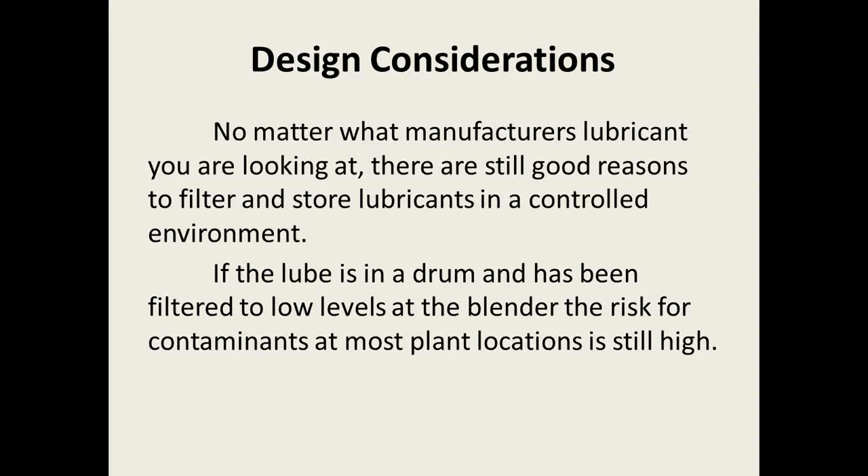Some of the additive packages are missing, or there may be moisture in the drum. A lot of people ask why I test new drums of oil - well, you find out a lot of failure modes just with the new oils.

So we have to filter out those contaminants to make our equipment last longer. But it's good to be familiar with your plant operation and what kind of contaminants may be present in the lube areas, what forms of foreign material are present. I was at an aluminum recycler a few months ago, and looking at their lab analysis reports from Insight, we found a high concentration of aluminum dust coming from their ambient conditions - not sealing things up - and particles in the lube containers.

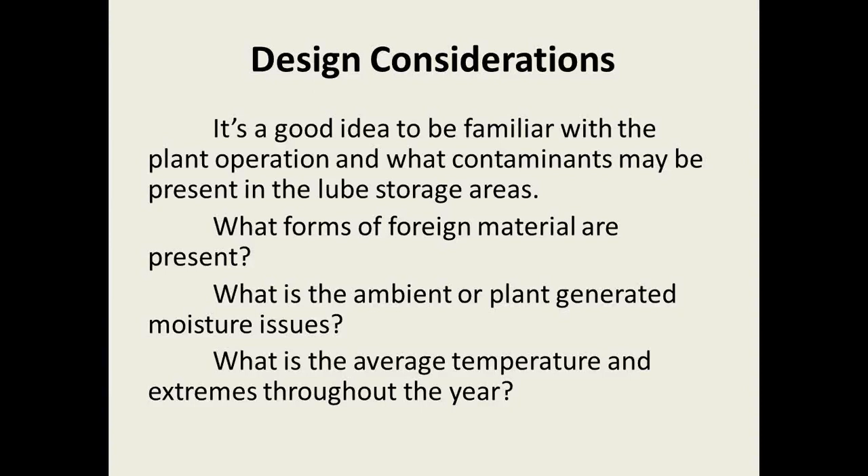What kind of moisture issues do you have at your plant? Are you a food plant where you have wash down issues? Is the equipment exposed to outside rain and high humidity like along the Gulf Coast? What's the average temperature extremes? I remember the plant I came from - in the lube storage area originally we could get as high as 110, 115 degrees in that building in the summer, and minus 20 in the winter at times. We had temperature extremes that cause your drums to pull moisture in. So look at all those conditions at your plant - what are we trying to eliminate?

When I do my failure modes of lubrication training, I talk about the 5 major lubrication failure mode areas: temperature failure modes - how can we control temperature; moisture failure modes that are in our lubes; and foreign material particles that may be in our lubes - what's the particle counts and what are those particles?

Viscosity failures - I don't have a lot of instances, but I've got a few where drums of oil sent to a plant from a manufacturer may have had ISO 220 stamped on the drum, and when I ran the test on the drum, it was ISO 150.

And then, of course, what other kind of contaminants besides moisture and particles are present? If you're storing your lubes around areas where they're storing lab chemicals, is somebody using those same containers that you're using lubes in? I was at a plant just a few months ago where they had their antifreeze for mobile equipment stored in the same area - there was antifreeze contamination because they were using the same containers for everything.

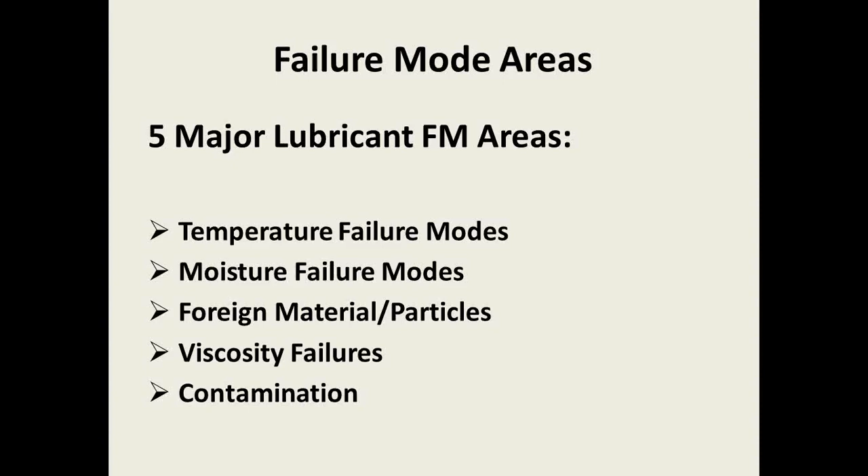So some program failures - I just highlighted a few here that go along with lube storage: not having procedures in place for ordering, receiving, storing. I've helped a number of companies write procedures for what happens to the lubricant as soon as it gets to the plant, how it's received, where it's stored, how it gets out of the environmental conditions.

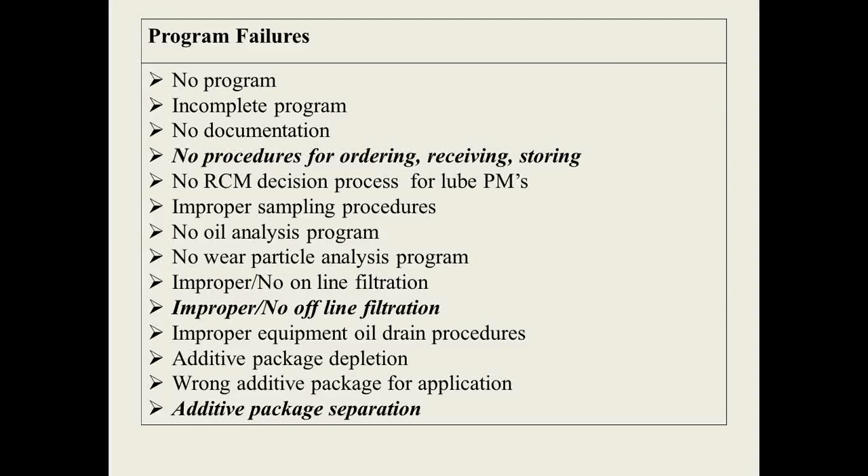Not filtering your new lubes as they come in - here's one a lot of people don't understand: additive package separation. The longer that lubricant is stored, especially engine oils, additives do settle to the bottom, so you can get additive package separation in your container or drum. This is one reason why, as a Cargill standard and some standards with other people that buy lube rooms, we recirculate the container once a month for about 10 minutes to remix that additive package - a very important process.

Here's some more highlights: no best practice lube storage rooms, no lube consolidation program. I've worked with a number of companies, and one I'm getting ready to go do a project on now where they have over 50 lubricants in the plant, and we're going to try to consolidate that down in the mid-20s. I was at a plant that had 22, and we were able to consolidate their program down to 10. A lot of times it's just the additive packages and different things like that, and we can consolidate a lot of those lubes down to get the minimum number of not only oil-based lubricants but grease-type lubricants too. No filtration training - a number of times I've asked people at the plant what's the micron rating on the filter on your hydraulic system?

Well, they have no idea what that means. They have no idea what the beta rating is. So with this training, they can order the correct filter and remove a lot of these particles and moisture.

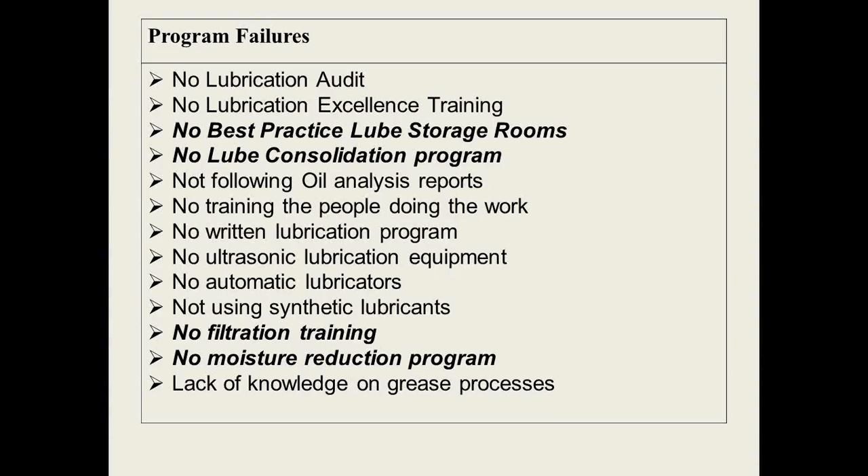You know, no moisture reduction program in place to reduce moisture getting into their lubes and products. What about foreign material? New oils are contaminated. Those particles are in there from the process of actually building or designing and building the drum itself, and the process the way the manufacturer actually fills the drum. Are they using the proper filtration? Are they storing it correctly? So it's one of these things, improper filtration of new lubes. All new lubes should be filtered. And then there's the filtration in your process equipment.

Even if we put a perfectly clean lube in your process equipment, it's going to gain particles over time. Now, are those particles dust or from the environment, or are they particles of wear from your machines? Well, the lab analysis can tell you that, but we need to filter those particles out so they don't cause wear. There's plants that have no filtration practices. They change oil on a regular basis, but maybe the oil they're putting in there is dirty. Maybe the oil that they're running is very dirty. You're not using vent filters to keep moisture out.

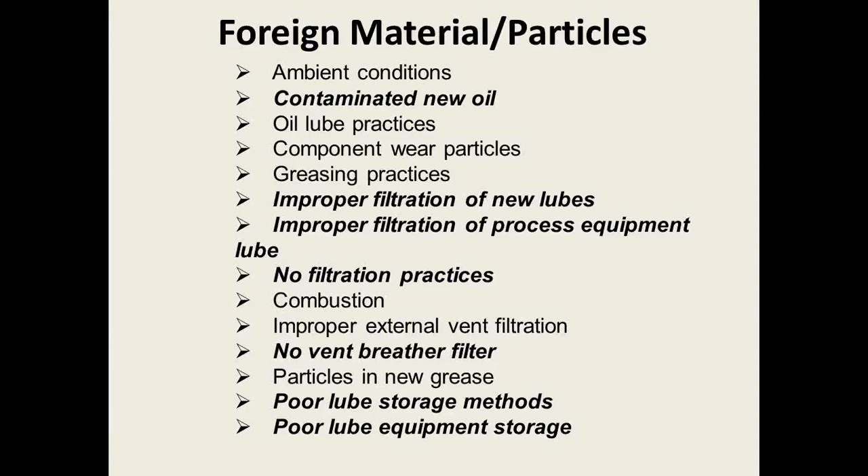Poor lube storage methods and poor lube equipment storage. You can put your lubes in perfect condition, but if our maintenance people are running around with vinegar jugs and Tide jugs applying the lubricant and storing those drums out in the rain and in the ambient conditions, we may still be adding particles to our system.

Moisture failure modes. Where does moisture come from? Ambient conditions, humidity and rain, and some washdown practices at food plants. Lubrication storage methods, you can gain a lot of moisture. If you have a drum of oil sitting in the sun, it heats up during the day, you get a little bit of rain on top of that drum, and it cools down at night. Even though the drum's never been opened, you'll pull moisture in through those bung fittings.

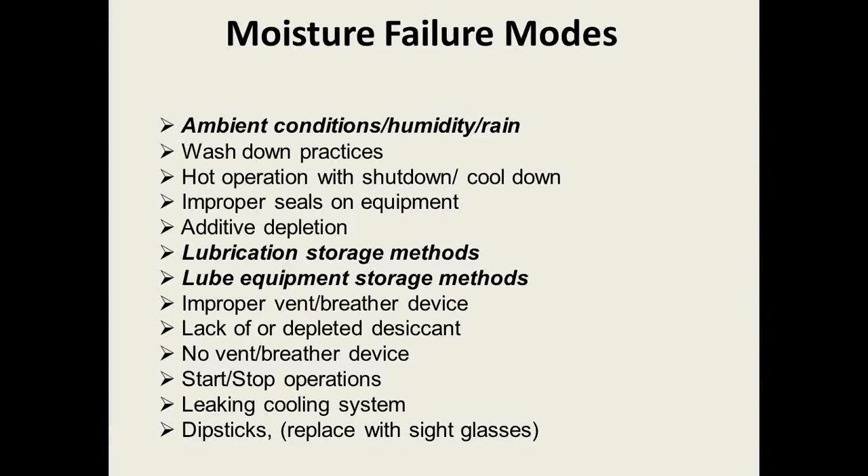What kind of equipment are you storing your oils in? We can gain moisture in those areas. So many of the failure modes in our plants start with our lube products not being received and stored properly. Moisture, FM, contaminants are in and around the lube containers and the lube equipment. And remember always that new lubes are not clean.

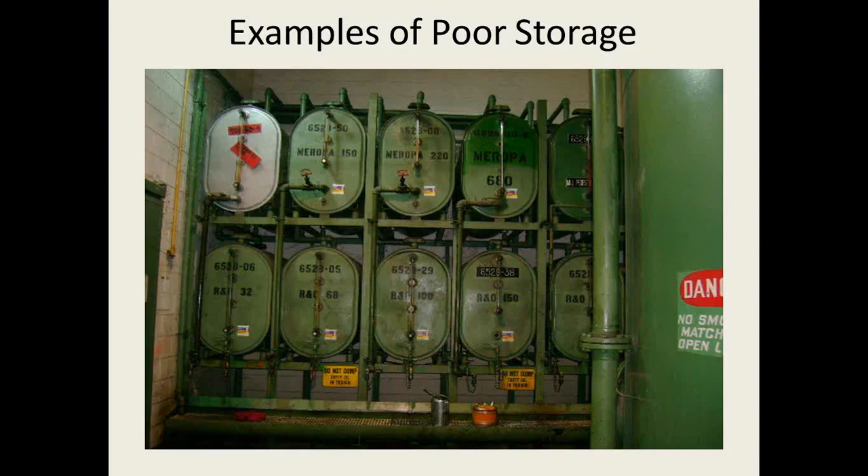This looks like a good storage system. This was at a power plant, but these tanks had been in there about 25 years. There was sediment in the bottom. They were filled from the floor upstairs where they dumped drums into a big sink and just opened valves to get them down into these containers. Even in the sight glass they looked good, but there was a lot of sludge, a lot of crud, and of course they were steel tanks in an unambient controlled room, so we surely had some rust in there. In the oil analysis on a couple of these tanks, we had moisture, high particle counts, and a lot of issues causing wear for their equipment.

This looks like a normal lube storage room. This one's a little cleaner than most I take pictures of, but here again, there's no desiccant breathers on the drums. The room was in an area where it goes through all the ambient changes, no heating, no air conditioning here, no filtration on the drum coming out. So again, a lot of improvements can be made in this lube room.

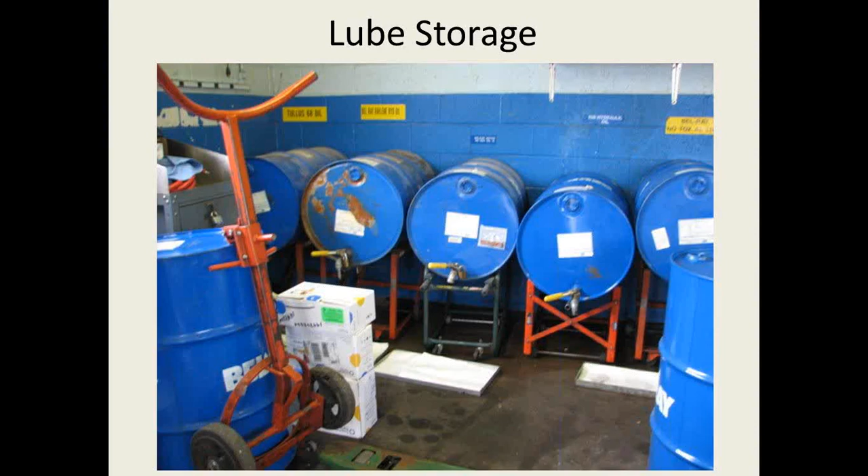Here's one where the drums are stored right out in the plant. You can see open containers that they're using for oil stored there. You can see drum pumps, funnels, all kinds of bad practices here that are going to cause moisture and contamination in your lube area.

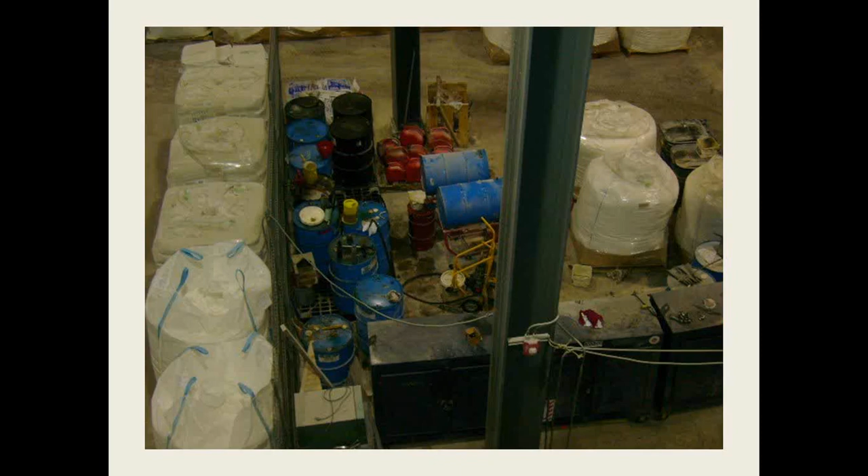This is in another facility where they're storing the lubes in an area where they're storing diatomaceous earth, silicone, and all kinds of filter aid products. You can see the filter aid and particles on top of the drums, and the yellow containers sitting on top. One of them has oil in it in the middle.

This looks like a clean area here. There's a drum of oil, this is for an expeller. This was at a plant in Canada. The expeller gearbox that the maintenance people topped off, probably daily, was about a $400,000 gearbox.

You can see this funnel sitting there covered with dirt and dust particles, not only on the outside but on the inside. As I watched them do this over the course of 2 weeks, they would, without a doubt, go over there and just dump the oil right into the gearbox. Again, high particle counts in very, very highly critical and expensive gearboxes, causing them to wear out about half as fast, or twice as fast as they should.

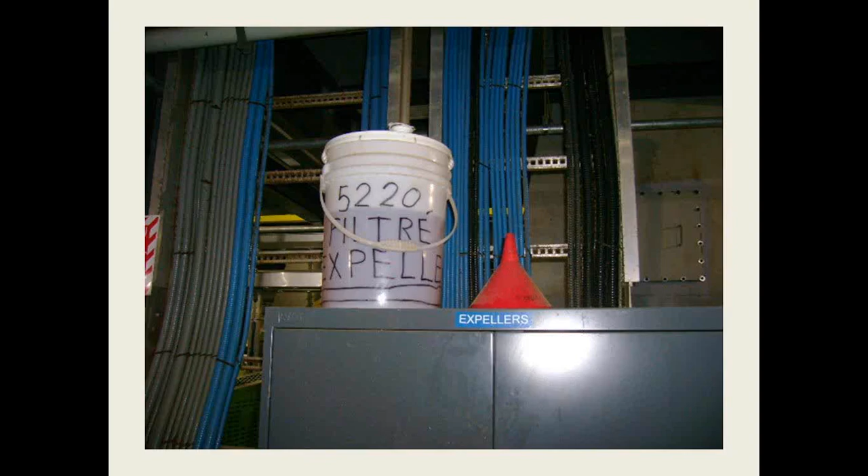I put this picture in as an example of precision lubrication storage. They've got new oils in here, used oils in here, mop buckets, and a shower curtain to keep contaminants out. Probably not a good storage area, and a lot of improvements can be made here.

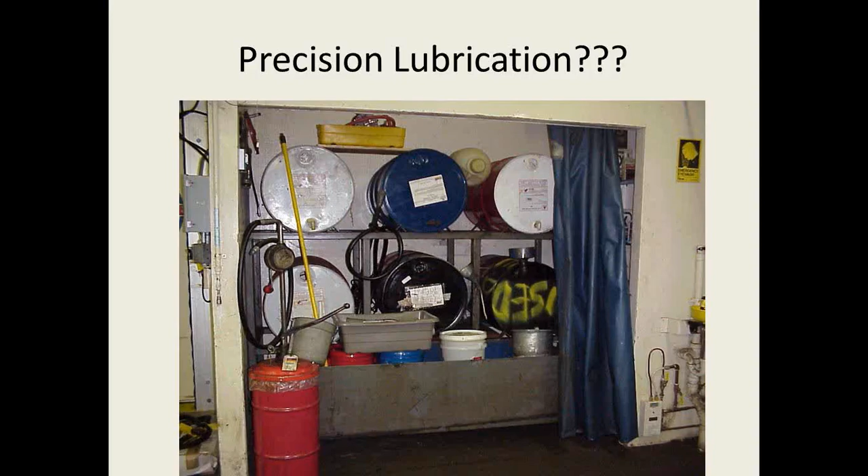So again, why do we need effective lube storage? Our lube products need to be protected from the environment, the plant dirt, the FM, the moisture, the sunlight. We need to filter our new lubes, or lubes as you use them.

A lot of my customers will just store the drums, and we have a little recycle device we can buy from Des-Case that will actually pull the lube out of the drum, recirculate it through a filter, and put it back in the drum. So we do a couple things with that: we filter the lubricant while it's in the drum, and we also mix up the additive package that could have settled to the bottom. There's also a spigot on there where they can take clean oil right out of the drum into their container.

Storage of your lube application equipment, your containers, funnels, grease guns and filters, these should all be stored in clean areas. We're trying to eliminate particles, and keeping your lubes separate from other plant chemicals.

I can't tell you the number of plants I've been in where you go in the lube storage area and there's lab chemicals and all kinds of other things in there that shouldn't be, and they're not properly labeled.

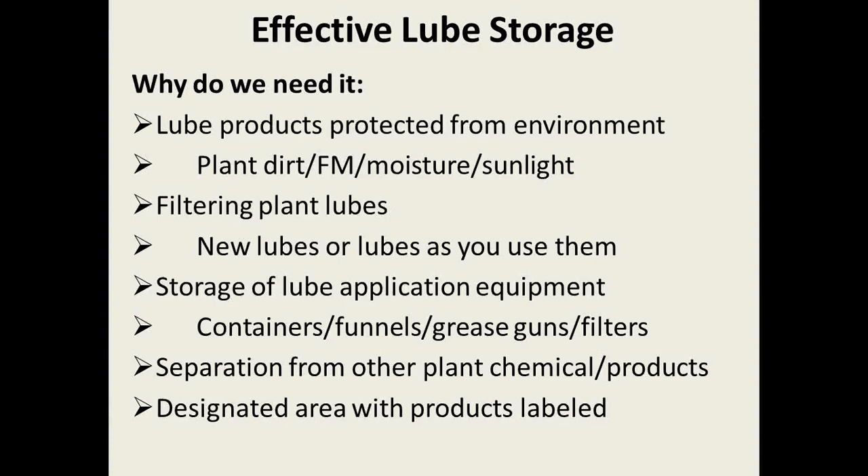There was a major failure at my plant where one of my maintenance people put the wrong lube in an Alfa Laval centrifuge. The lube had a 25 on it from Alfa Laval, and the ammonia compressor oil for that plant also had a 25 on it. You can imagine what happened 24 hours later when the gears failed - that was a major downtime just by not having things properly labeled. So labeling is very important.

Products should be stored at a controlled temperature. One reason people tell you to store your grease guns on their side or on their ends is because if they warm up above 104 degrees, the oil will actually start separating and leaking out. And of course, if you're storing them at a higher temperature, they will oxidize a lot faster.

You want a product stored in controlled humidity conditions so moisture can't get into our lubes. We want our products labeled and visible so it's easy to see. Now, the ISO codes for different colors of lubes—as we build more and more lube rooms, it's becoming more popular to color code not only the lube container, but the lube equipment. It's a clean area to fill the lube equipment.

A lot of times I go into plants. I was at a gypsum plant where the maintenance guys were filling the lubes with massive amounts of dust in the air, filling their containers up in the lube storage area. And of course, that dust was going right into their containers.

We can recirculate our lubricants to mix additives and refilter them. It's a better inventory control method—using the oldest lubes first.

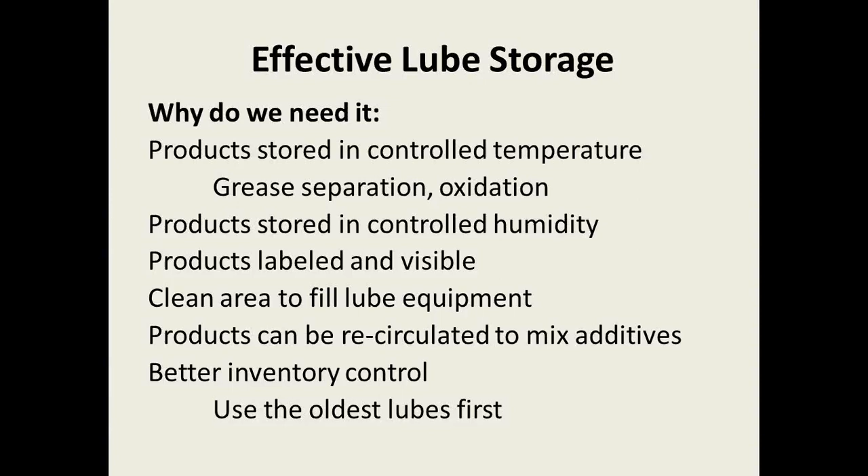I was at a plant in Texas where I crawled across the top of a bunch of drums stored in the lube area, and there was a drum that was 10 years old in the back of that storage area that had never been used. Of course, the supervisor asked me what he should do with it, and my answer was you have to dispose of it. There's moisture, the additive package is gone, and it's going to add no value as a lubricant in your critical equipment. So again, we have to move from storage areas like this where we have lots of dust and contaminants, and we need to move into areas where we can eliminate the dust and dirt and the things that are around there.

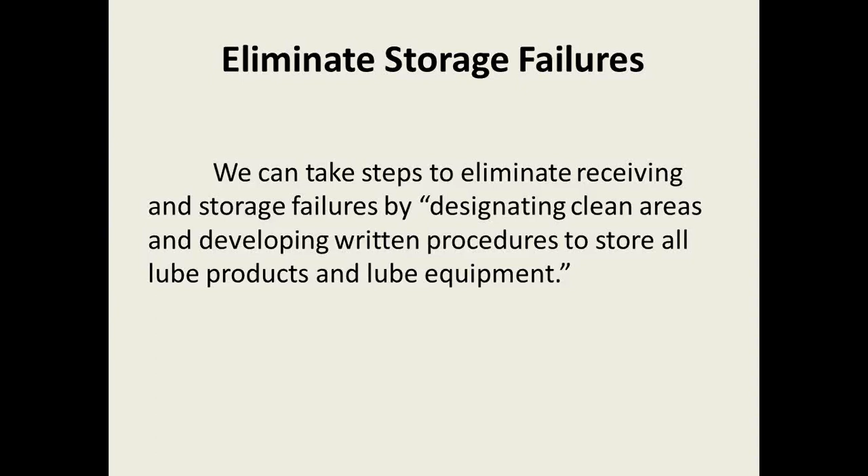This develops the need for writing some written procedures. If anybody needs help, I've got a couple that I've written for companies that probably won't mind if I share those with you—just what your written policy should be for receiving, storing, and taking care of your lubes. So it's a must for any plant moving into lubrication excellence. If you've even thought about it, or this is something your plant is looking at, this is the first step.

So remember, I'll repeat: your new lubes are not clean. They're clean to some standard. If you check with Insight and look at their reference samples, you'll see most lubes are 18, 16, 15, probably as an average. That's normally what I find in brand new drums of oil, but as those drums sit around and go into different equipment, you'll see those ISO counts go up into the 20s. Now, I like to take new lubes and filter them down to 16, 15, 12 if I can, or better. That's why we try to put filters on our lube rooms to do that.

Our lubes must be clean and dry. You'd be surprised how many lubes I test when you go down to the bottom of the barrel or drum when you pull your sample, and see how much moisture or other contaminants are in the bottom. You know, controlling the environment that your lubes are stored in—I talk to plant managers about this, and they look at you like you're crazy that you need your lubes stored in an air-conditioned room or a heated room. But it's actually true. If you want those lubes to last a long time, we need to store them correctly.

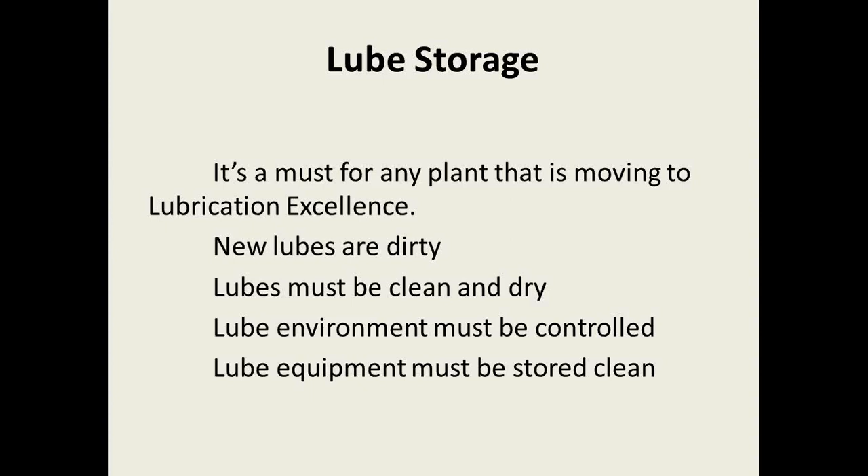This is an illustration of a human hair—these are the particles we're trying to get out. That big particle there is probably 40 microns. The diameter of a human hair is about 70 or 80 microns. So you can see the particles causing us the most trouble are not ones we can even see with the human eye. The human eye can only see a particle larger than 40 microns. We need to reduce our particle count—we need to get out those particles we can't see.

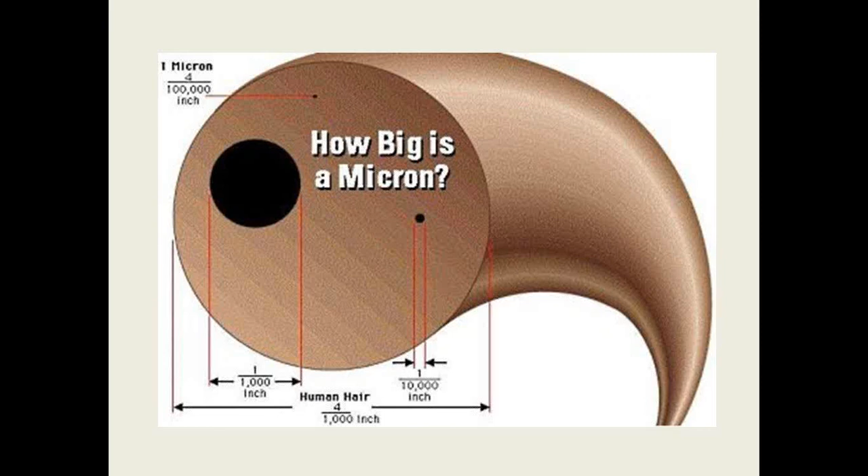This is a slide from when I was doing training at my plant for my maintenance people years ago. The sample on the right, I had a maintenance person pull from a gearbox. The oil had been changed about 2 months previously. I had him bring it into the shop in a glass sample jar, had every one of my maintenance people look at it, and asked: should we change the oil? The oil looked great.

It was a golden color. I couldn't see anything in it. They couldn't see anything in it either, and they all said no, there's nothing wrong with that oil.

When I sent it to the lab, this is the picture that came back. It was a 22-19-17. All these particles in there: fly ash, coal dust, some metal particles, a little piece of brass or bronze there.

We went up there and filtered that gearbox with a 10-micron beta 200 filter. The lubricant came back from the lab as a 17-14-12. This is what it looked like under the 100-power microscope.

Now all I had to do was ask: how much longer will the gearbox last if we keep the oil like it is on the right rather than like it is on the left? And the answer, this is going to be the same for all your equipment, whether it's a hydraulic system, an engine, or a gearbox: they're going to last 5 or 6 to 8 times longer.

And I've seen particle counts. I was at a plant in Alabama where we pulled oil samples out of all the hydraulic units. They had nothing in the plant cleaner than a 23, 22, 21. So after they did the training, they did a lot of filtration. We built a lube storage room there, and they're going to get a lot longer life out of their equipment. For that plant, probably 8 to 10 times more life.

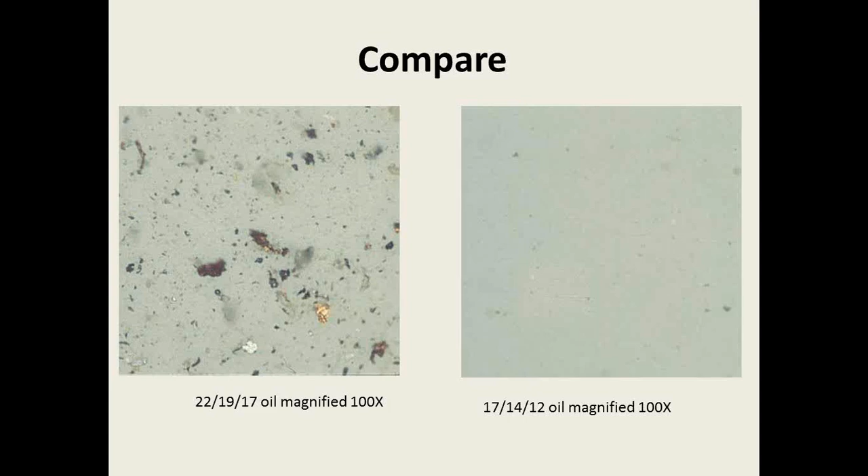This is just a typical hydraulic system. If we take an ISO code on the side there, a dirty ISO code, let's look at the 22-19-17, and we filter that oil down. If we go to the top bar, filter it down to a 16-13-11, which is about 10 micron beta 1000, you're going to get around 5 times more life.

And as we start filtering that oil down to these lower levels, you can see if we went down to a 3 micron beta 1000, you're looking at 10 times the life. So that's a typical hydraulic system, and I know it works. We accomplished it at the plant that I came from, and we're accomplishing it at a lot of facilities around the U.S. and around the world.

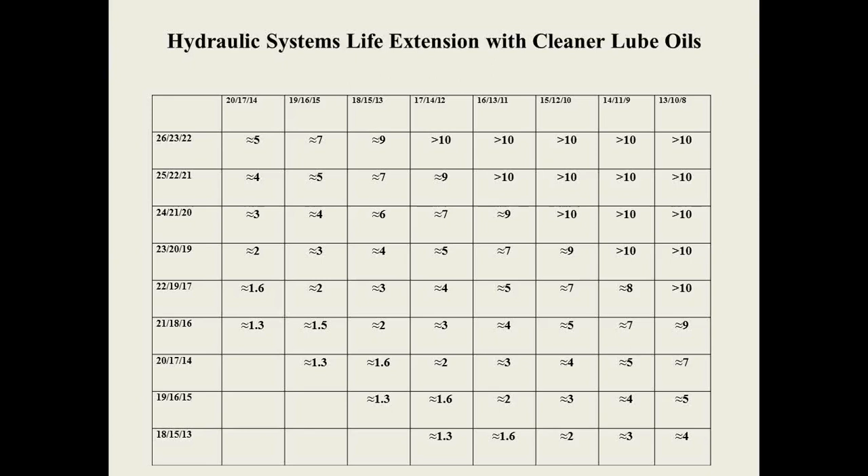Moisture failure modes. If we look at the left-hand column here, we see 1,000 parts per million of moisture. If we can reduce that 1,000 parts down to 50 parts per million, look at, if you follow that bar up to the top bar, that's 6 times the life just from reducing moisture. So you can see the effects of particles and the effects of moisture have a huge effect on the life of your equipment. Both these things we have to figure out how to keep out and how to control in our plant equipment.

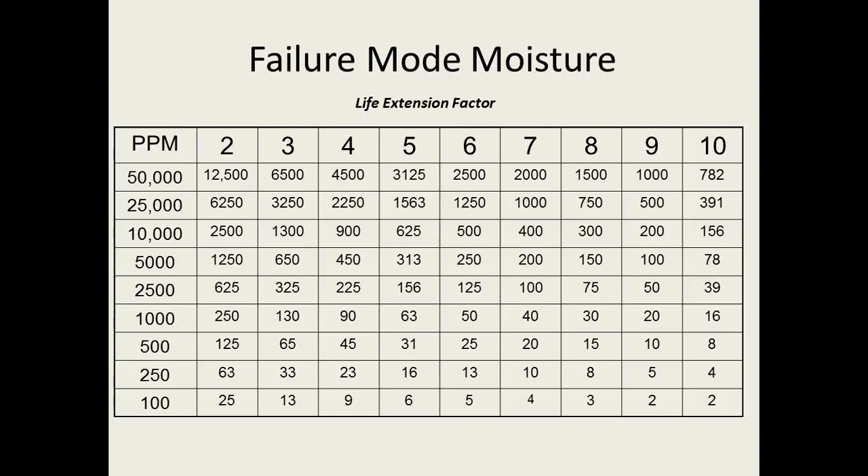Here's a bearing life extension chart. Again, I'll show one more of these where we see the 22-19-17 on bearings, and we follow that line across to the 16-13-12, your beta 1000, 10 micron, and you can see that's around 3 times the life. And then as we clean that oil up, the life gets better.

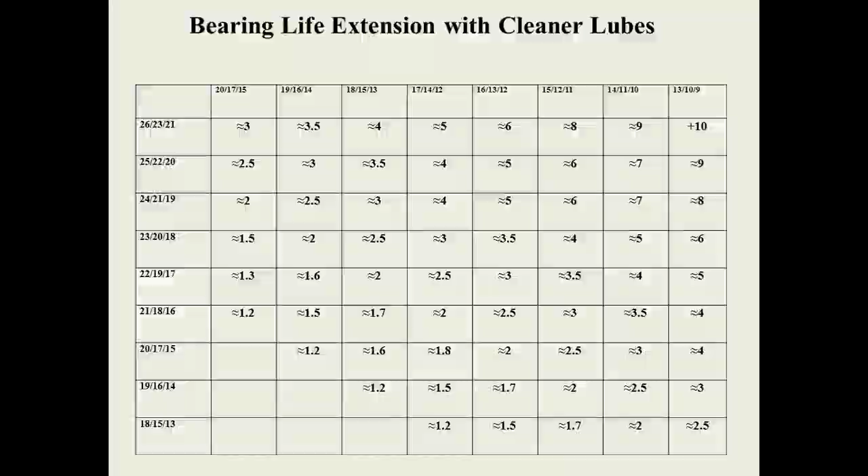So lubrication storage fundamentals: again, develop those written procedures for how to get the product stored, how you get them filtered. Develop some filtration standards for moisture and for material. Now, one of the things - if you're not careful, you don't want to start filtering down to very low ISO codes right away. Pick a contamination level. If you find a lot of your equipment's above 20, try to get that filtration level down to about an 18, 16, 15, at least back to new in your equipment. Then as you get your program developed, start using better filters and better procedures.

Design an area away from foreign material, moisture, and contamination, and make sure that room is ambient controlled - it's very important for the life of your lubes. Store lube equipment in the area to keep particles off your lubes. I remember my guys got so into this that when they came in at the end of the day, they would put their grease guns into a plastic Ziploc bag and put them in a cabinet. We were trying to control all the particles that were in our equipment.

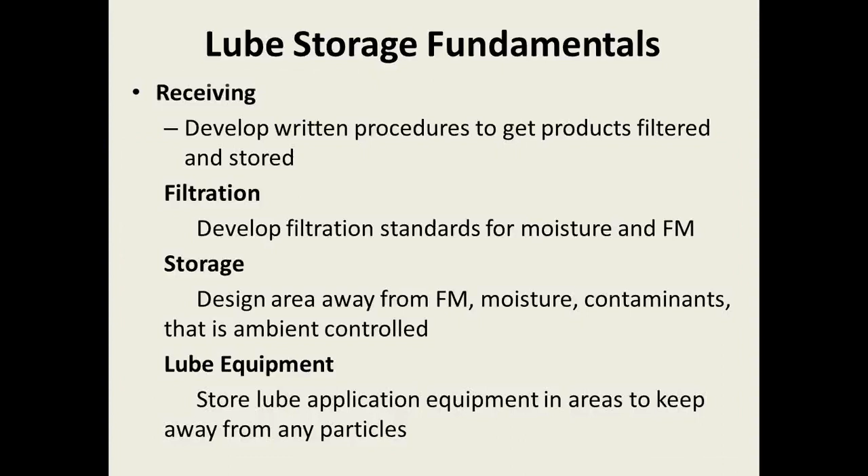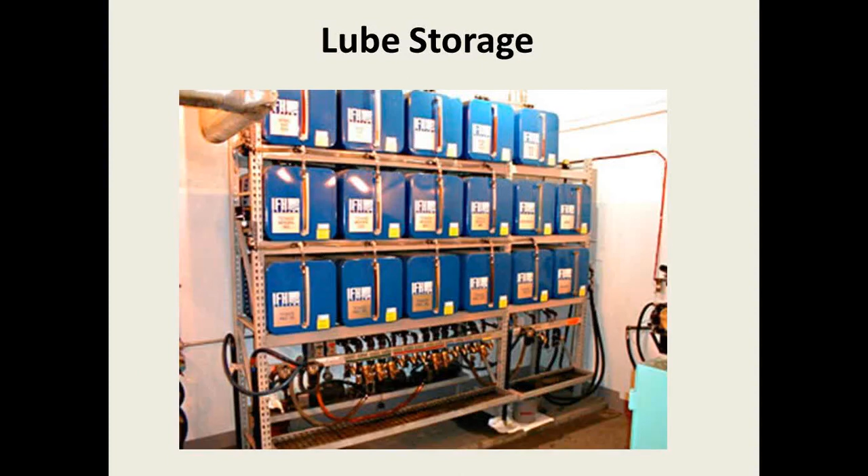This is some bulk storage at a facility. The reason I kept this slide in there - one of their big issues was a lot of moisture in the oil, so we put desiccant breathers on top of these tanks. I came back six months later and the breathers had gone from blue to red to white. So I told them, if you're not going to change the breather, you might as well just put the vents back on top to atmosphere. But again, this is our effort here - we're trying to eliminate moisture.

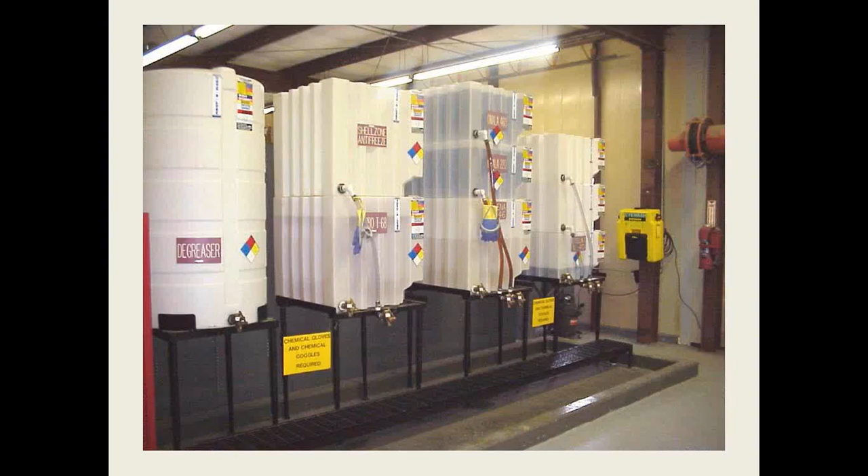Another lube storage area, building a chemical area of the plant. But again, lube's in clean containers, in a spill-controlled area. They're trying to make an effort to keep their lubes in an area where they're not going to get contamination.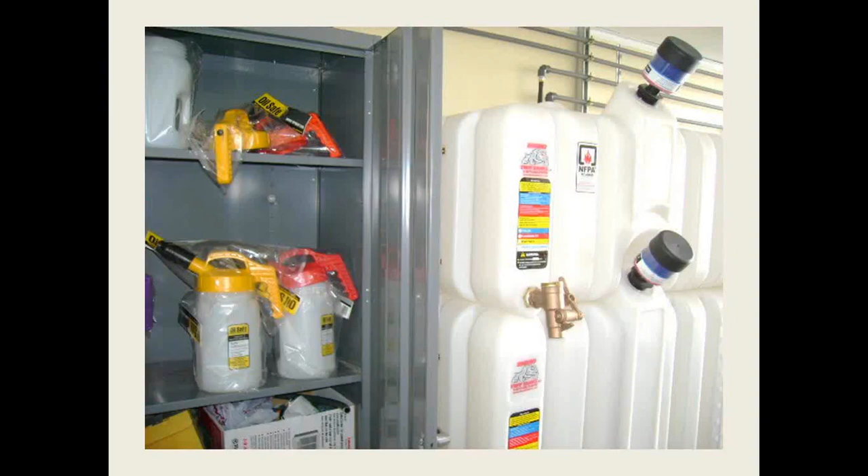Here's a picture of a storage cabinet. This is in one of the lube rooms we sold a customer. They got their oil-safe containers, they got a cabinet in there, they got some plastic storage containers to store all their lubes. And this room is actually in an ambient controlled room also.

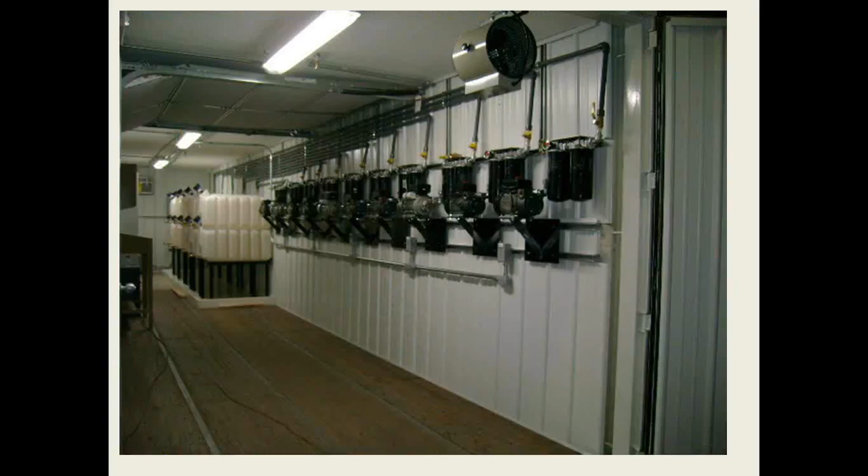Here's a 40-foot shipping container we built for a customer in St. Louis, or outside of St. Louis. They had 10 different lubricants there. Every lubricant came into the room, there were 10 different pumps, each with dual 10-micron beta 1000 filters on there, and it pumped the oil into the 10 tanks you see at the far end of the room.

Desiccant breathers - each pump would have a lance. They had stored drums right underneath the pumps. But you can see a very, very nice storage room. The room was air-conditioned, the room was heated, and only certain individuals were allowed in the room to maintain it.

This one had some spill control. You can actually, in these 40-foot containers, make the whole bottom floor spill control if you want more capacity. But you can see a nice storage room. Again, all they have to do is hook up the power when it arrives at the plant.

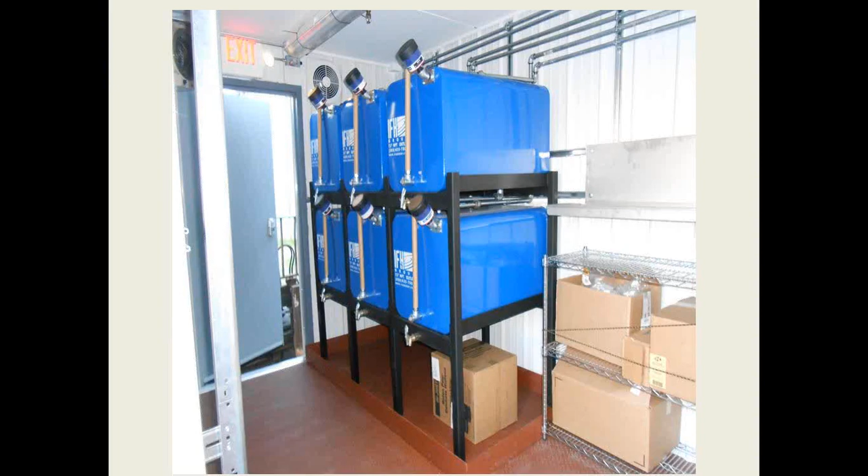Here's some of the options, storage benches and cabinets and things like that you can use in the room. This is a company that uses all steel tanks, all steel piping, and a steel floor. Their conception of fire control was to keep everything in steel. But as I'll explain later, lubricants aren't very susceptible to catching fire, so we'll discuss that on the last slide. Here you can see another effort, an ambient controlled room to control where the lubes are stored. Very nice setup.

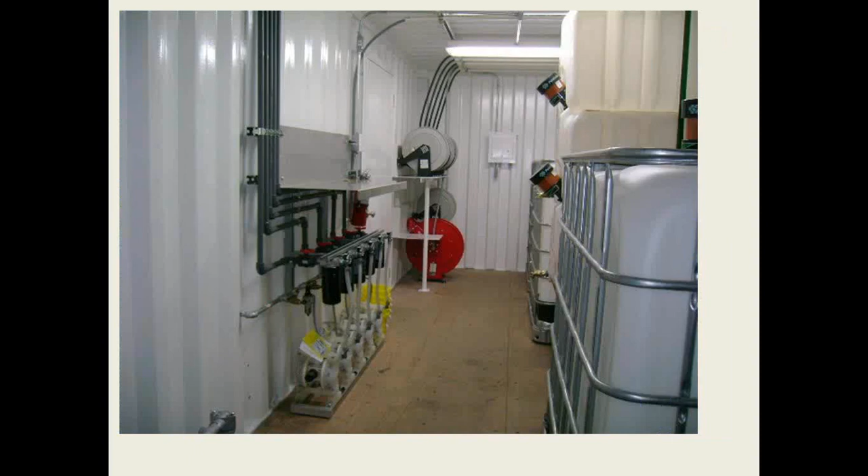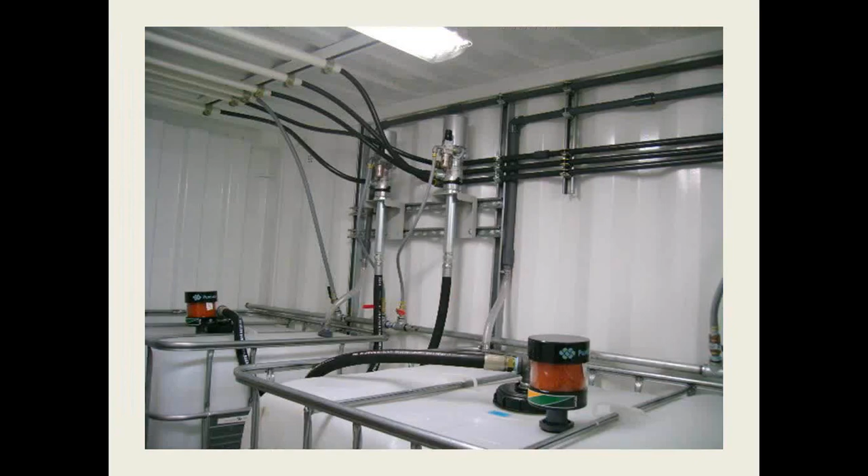This one here was unique. This is in a salt mine about 1,800 feet under Lake Erie and about 3.5 to 4 miles out under the lake. The company has a lot of mining equipment down there, so they bring all the lubes in through little air pumps on the side, filter them into these containers, and then on the wall the lubes are pumped from the containers to the hose reels. Nobody's allowed in this room but one person.

Again, with your lube equipment, get your guys trained and in the habit of storing the oil-safe containers, storing your grease guns, storing your greases in a controlled environment. If you can, it can be ambient controlled, but at least get them out of the particles and the dust.

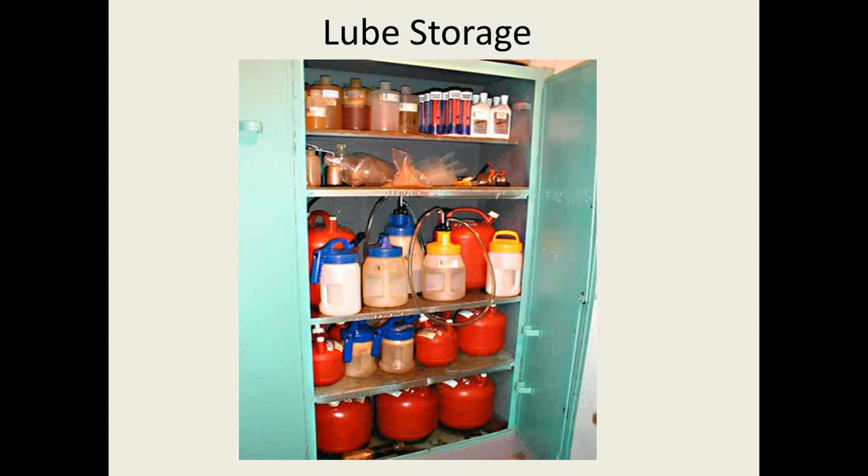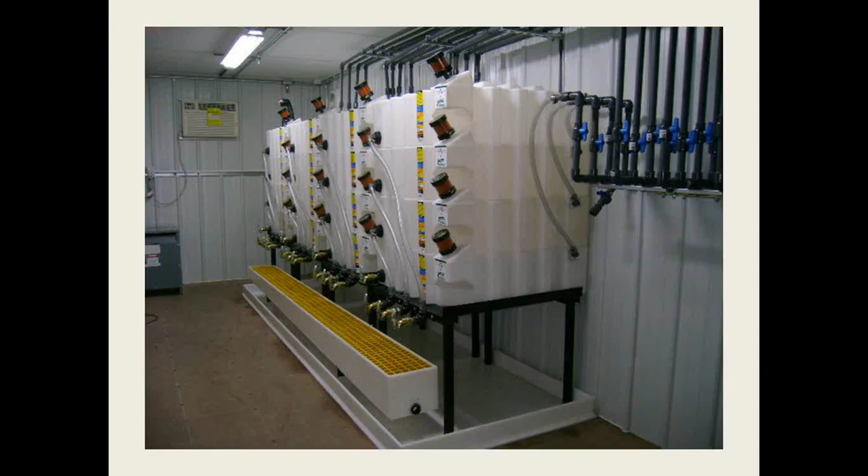Here's the inside. You can see smaller tanks at this facility, all 35-gallon tanks with breathers. They have a drip pan underneath to catch any drops that come out of the spigots, and all spring-loaded valves on the bottom. Again, just a lot of options you can use, and you need to think about some of these as you're designing your room.

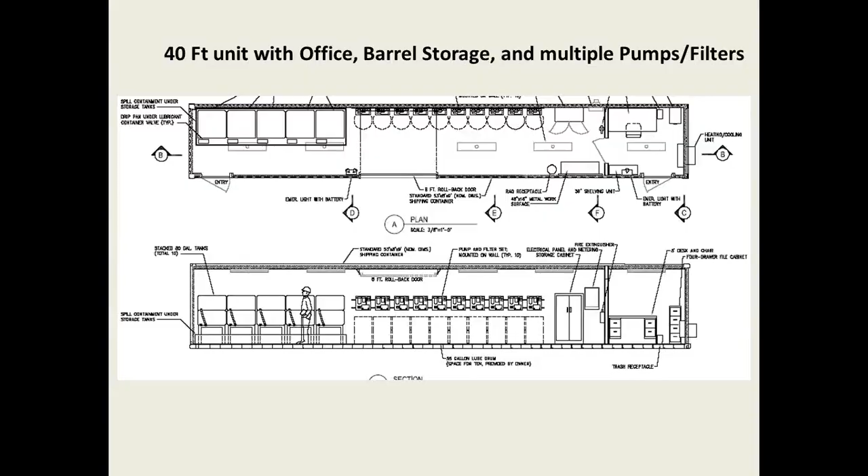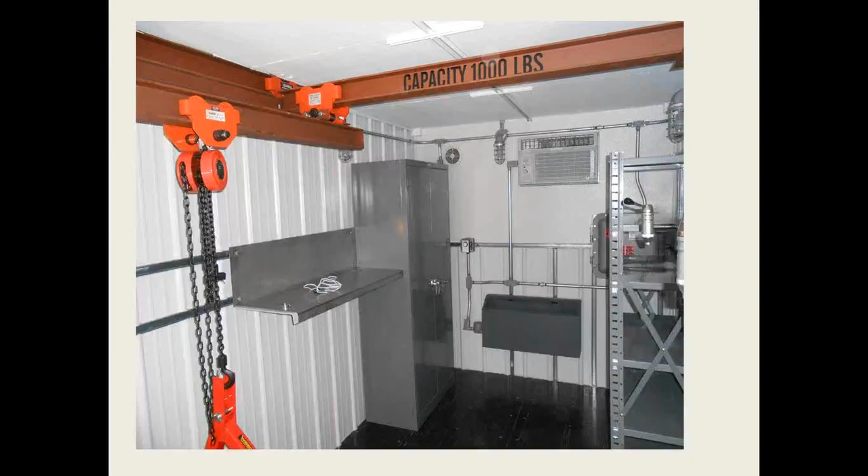You can see here they got drum storage in the room with their roll-up door, plus being able to filter all the lubes and get them into their containers. I wanted to show you this one - there's a lot of concerns nowadays over maintenance people handling drums.

This is a trolley system we build, so you can actually pick the drum up outside the room and move it into the room, set it anywhere you want it. Now this unit here, if you look in the background, happens to be Class 2 Division 2 explosion proof for coal dust, so that's another option. They didn't want their guys handling drums, so they can take the drums into the room - it's an all-access drum trolley built inside of a 20 or 40-foot container.

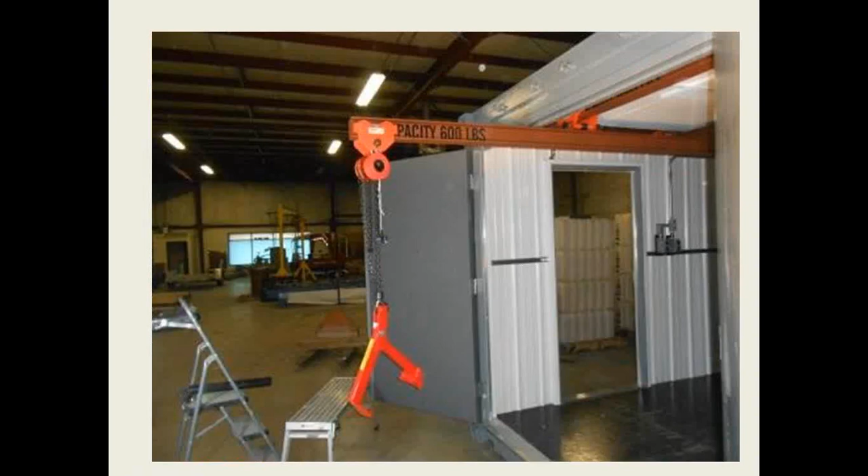Now this is the system here I told you about earlier. That's in the room with the trolley, and all they do is bring drums in. You see this device down at the bottom leaning against the wall - you can buy those from Des-Case, and you can also buy them from me, I'm a Des-Case distributor. You screw this into the 2-inch bung hole in your drum, hook the hose up to it, and pull the oil out of the drum.

You run it through the pump and the filter. This one here's got an air pump on it, and then you recirculate right back in the drum. So you can recirculate the drum and pull out all the particles.

You can mix up your additive packages, and then you see the little beer tap spigot valve. This is where, while the drum's circulating, a maintenance person can come in and fill up his container right there out of the drum. So everything coming out of the drum is filtered. And if you filter that into an oil-safe container, that means he's got clean oil actually in that container where he's going out and putting it in your equipment.

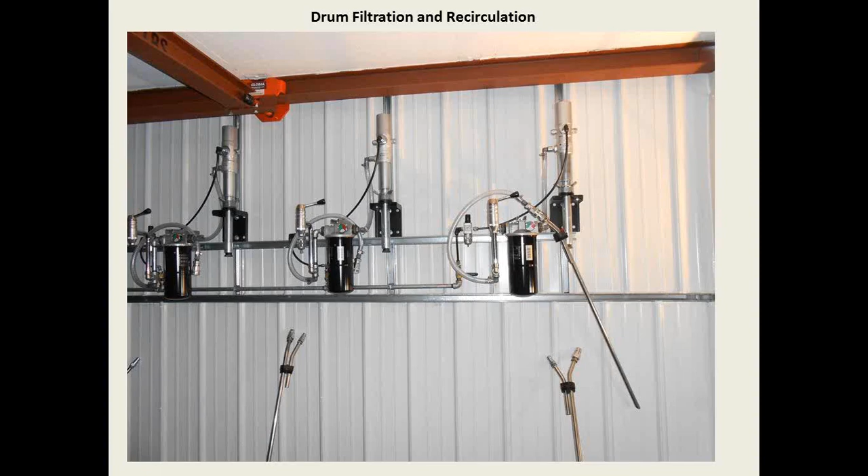So again, it starts lowering those ISO counts because you're now actually adding clean oil to your equipment. So again, a lot of different options, a lot of different things you can do here to improve your lube program. You actually don't need to buy big plastic tanks and things like that if you use the method this company used. And again, this is stored inside of an ambient controlled room, the drums are.

So some design considerations, and I'll just go through some steps here. The first thing you want to look at is, can I consolidate my lubes down to some manageable level? Can I get all the lubes into one or two locations? Some of your bigger facilities—I'm working with a big company now, and they're going to have five lube rooms in different locations around a mine because they can't consolidate everything down to one location.

Determine any contamination issues with your current storage methods. Where are the contaminants coming from? Is it the way I'm storing it, the way I'm receiving it?

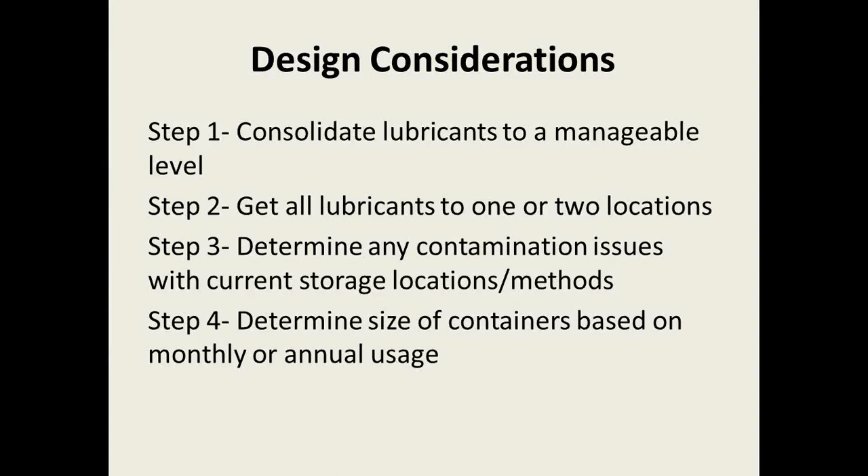And again, this is another step here: determine the size of the containers. You have to know what your monthly or annual usage is. Some of your containers may be as low as 35 gallons. Other containers may be as much as 300 gallons you want to store. So determine those storage container sizes.

Determine the storage container material. Now, I prefer plastic storage containers—the material's a lot cleaner, and you don't have to worry about rust. There's a lot of people that still order steel tanks. As long as you got those steel tanks in an ambient controlled room, you're fine. But if you put those tanks in an area where it's going to heat up and cool down and there's a chance to get moisture in there, you could develop rust over the years. We also sell aluminum tanks, which work very well, especially in corrosive areas.

Determine your ambient control needs. If you're in San Diego, California, the temperature extremes are not very much there, so you may not need any air conditioner, heat, or not even a dehumidifier. But if you're on the Texas coast, you may not need heat, but you're going to need an air conditioner, and you're probably going to need a dehumidifier in that room.

Determine your fire safety controls if needed. That a lot of times is determined by your FM Global insurance guy or your company policies. But again, do you want water fire protection? Do you want dry chemical? All those options you have to look at.

What do you need for auxiliary storage cabinets? Store your equipment, your grease guns, your containers, and your actual grease tubes. And then you've got to determine the type of pumps—do you want electric pumps, do you want pneumatic pumps? All those things are available with different options.

And then what filtration level are you going to try to go to first? Do you want to start out at 10 micron beta 1000? Do you want to jump right into 3 micron to get all the particles out? Those are other decisions you have to consider when you're designing your room.

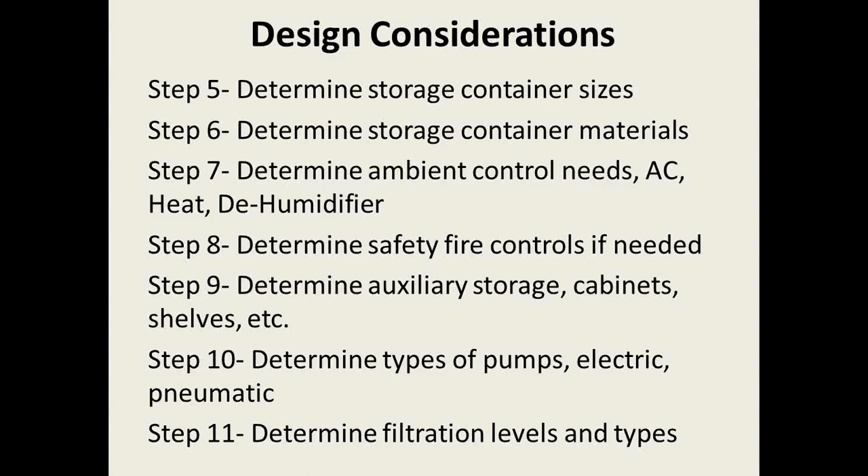Spill control—what's the spill control method going to be? There's not many facilities that are going to be built at any plant without having this item covered. So, do you want spill pans underneath the containers? Does the whole floor, does the whole room need to have spill control?

What's the access to the lube storage area? Is it in an area where everybody can get to it?

Then, of course, there's a lot of accessories. The hose reels - a couple companies put hose reels on so they don't have maintenance people in the lube room. There's all kinds of options for paint, vinyl siding, different things like that. What are you going to build the room out of? And then, of course, reemphasize material storage safety issues.

Remember that lubricants do not put off vapors easily. If you look at the vapor flash point of lubricants, I think the lowest one I've seen in years is 465 degrees F, and they go up to around 525 or 550. So a lot of people will ask me and tell me they want explosion proof since it's an enclosed room storing lubes, and you really don't need that. I sell a lot of them - I don't mind building them, but it's something you pay a hefty price for.

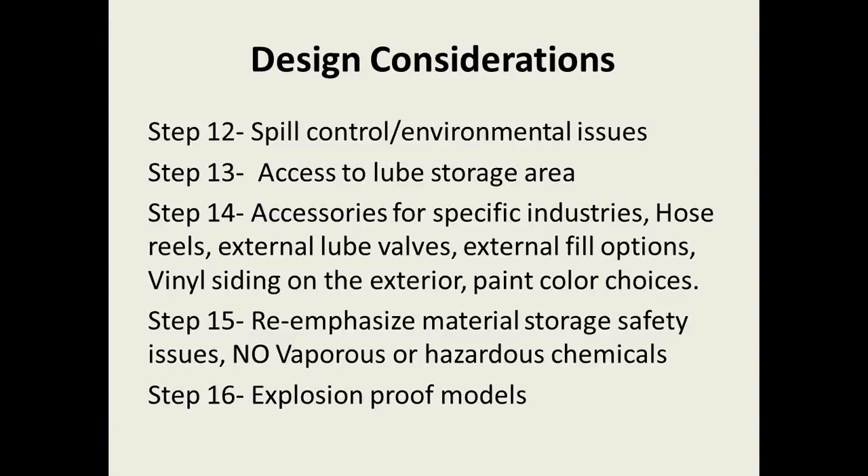Here's what lubricants are. Lubricants are Class 3B fluids - they have a vapor flash point above 200 degrees F. So that's what a Class 3B fluid is, but lubricants have flash points from 465 to 525. They're very hard to get burning and keep burning without a sustained fuel source. I used to demonstrate this with my maintenance crew and some others.

If you take just a 5-gallon metal bucket, you put a gallon or two of lubricant in the bottom of it, and take an acetylene torch and put it down on the lubricant - after a while, you can get it to burn. But as soon as you take the torch away, the fire goes out. Now, if you heat the outside of that bucket to a high temperature with the torch, and then run the torch across the top of it, you can get a flame and get a flash. But again, in most cases, you need to look at this when you're designing your fire protection system.

The majority of my customers, I put a water sprinkler line in every unit, or we have water sprinkler heads in the units we built at plants, but that water is just to put out small fires that may start in the room. Other customers don't have access to water, so you can put a dry chemical tank in the room with some nozzles that put off nitrogen and dry chemical for a small fire. But again, I get calls all the time from fire marshals that say, well, you've got oil stored in this room and you need foam because that'll never put out a fire if the lube containers catch fire.

Well, I can tell you now, if you catch a couple 80-gallon lube containers on fire, there's not much you can do about it. So what you're trying to do with your fire protection is control any small fires, like from some smoldering rags or some other reason they would catch on fire. But keeping these lube rooms clean and free of vapors is one of the things I tell people - your fire protection can be minimal then.

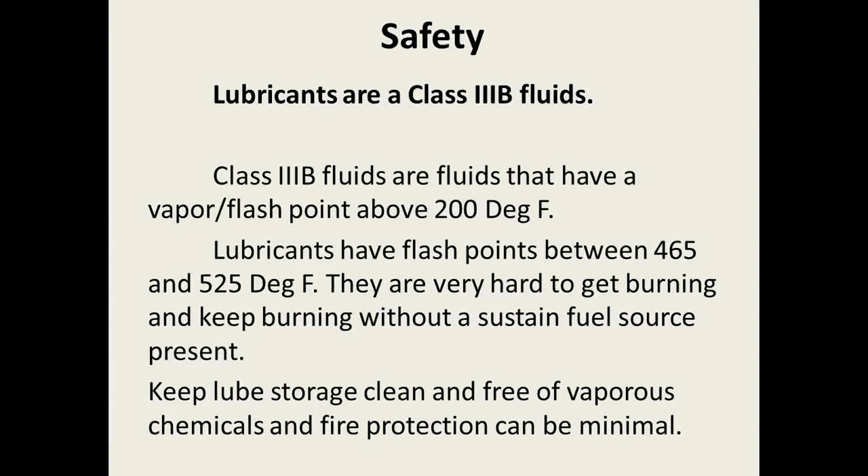All right, so I'm hoping that helped everybody in looking at considerations for designing their lube storage. I'm hoping that gives you some ideas, but again, there's a lot of failure modes, as you can see, in storing lube and receiving lube that we can eliminate, and your equipment's going to start lasting much, much longer.

Wonderful, thank you so much again, Terry. We do have a few questions, but it looks like they're very complex. Maybe this one you'll be able to quickly answer. Let's take a stab at it - what do you say, Terry? Is that okay? Sure, sure, let's go for it. Okay, let's see.

At what filtration level do you start filtering out the additive packages? Well, many of the additives are soluble, but if you get into zinc that's in hydraulic oils, that could be a particle. I've been told that the particles are usually never larger than 3 microns. So I always tell my customers in industrial situations I wouldn't filter below 3 microns. I have a couple customers that filter down to 1 micron, but I think for most industry use that's probably too low. In my training, I teach that the average film thickness of a loaded bearing or a loaded gear is 5 microns. So if we get particles out smaller than 5 microns, you're going to have very, very little wear from particles.